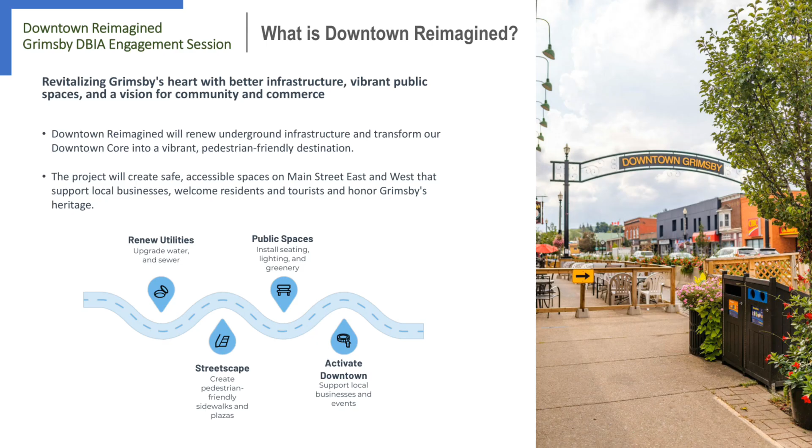The town has partnered with consultants who are industry experts to implement this project. We have been working in collaboration with the Downtown BIA, the Grimsby Chamber of Commerce, and the Niagara region. As the town prepares for construction beginning in 2026, this presentation is intended to update you on the progress of the detailed design and to showcase what we will be building.

The visioning phase culminated in the creation of a conceptual design, and we have built on what we heard from you to create the current design. The following slides will walk you through the updated proposed phasing and timing of the downtown project and explain how access to storefronts will be maintained throughout the work. There will be an emphasis on communication throughout the remaining design and construction phases, and we will outline how and when information will be shared as details are finalized. We want to hear considerations from businesses so the town can address what matters most as construction planning moves into its final stages.

During the visioning phase, we heard some really great feedback from businesses and the public. There was a lot of positive input with respect to improvements which should be considered. We also heard some concerns about things like availability of parking and traffic congestion. Some of the overarching themes we heard include the importance of improving the overall pedestrian experience. We heard strong support for a mid-block pedestrian crossing between Ontario and Mountain Street, ways we could enhance the streetscaping that would be complementary to the historic character of our downtown. The importance of these improvements in helping support the long-term health and prosperity of our downtown, and the need for the town to develop a strategy to help guide how we should be handling vehicle parking as the downtown continues to evolve. There were various outcomes from the visioning exercise.

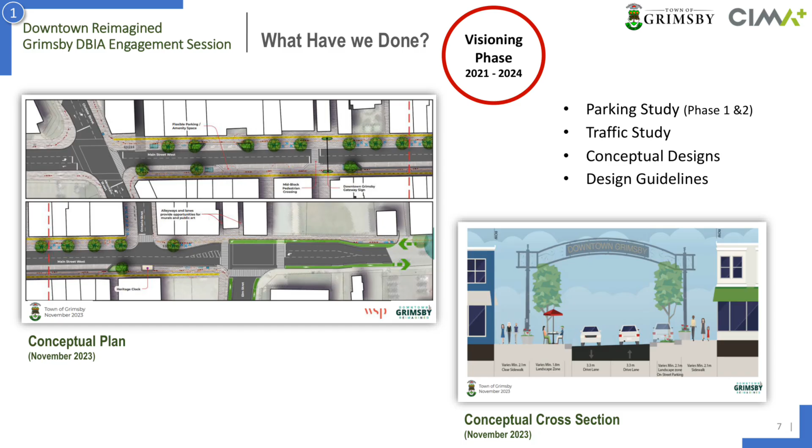As we moved into the design phase, we have had many opportunities to collaborate with our downtown business partners. If I could sum up the general sentiment, people are really excited to deliver the vision, but they are also concerned with the impact construction will have on their businesses. We have heard a lot of feedback with respect to the scheduling of the construction. Earlier this year, the consensus seemed to be to do the work during the summer, and that it was important for us to stay away from the Christmas season. However, more recently we have heard that the summer would be challenging and that we should avoid summer construction altogether.

Some of the themes we have heard include we should consider extended project hours, including around-the-clock or nighttime work, concerns about how we will be managing traffic, parking, and pedestrians, and questions about how businesses will be kept accessible, how their patrons will access their businesses, how deliveries will be received, and so on.

Building off your feedback, we wanted to update you on our progress and show you how that feedback has been incorporated into our work. The town has hired a professional design consultant to lead this project, who have experience in managing projects of this scope. With their support, we have now reached the 60% milestone in the overall design and are on target to put the project out for pricing early in the new year.

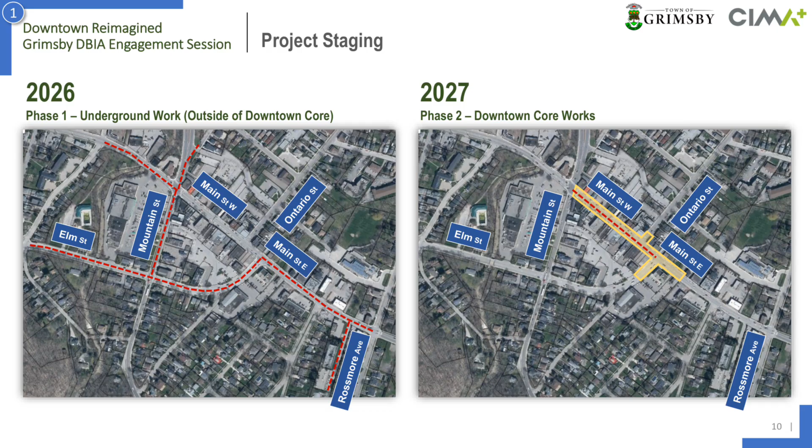There are several key risks we have and will be managing as we move through the project. In terms of scheduling, utilizing a 2-phase approach will allow us to minimize these risks by isolating disruptions to smaller zones and shorter timeframes. The way we are staging the work will allow us to maintain dedicated customer routes to ensure access is maintained to the storefronts.

The staging approach also allows us to keep the work zones smaller, refined to specific areas, which gives us greater ability to keep the traffic flowing to the parking lots. We have done a lot of pre-investigative work to locate underground infrastructure ahead of time, which will help limit finding unknowns when we start digging up the road.

Phasing the work gives the town more time to refine the road design, helping limit scope changes during construction, which can cause delays and become more costly. Breaking the work out into 2 smaller phases means the scope of each phase will be more manageable for the successful contractor. It also allows the town to have closer oversight on the contractor's progress so we can make adjustments as needed throughout the project.

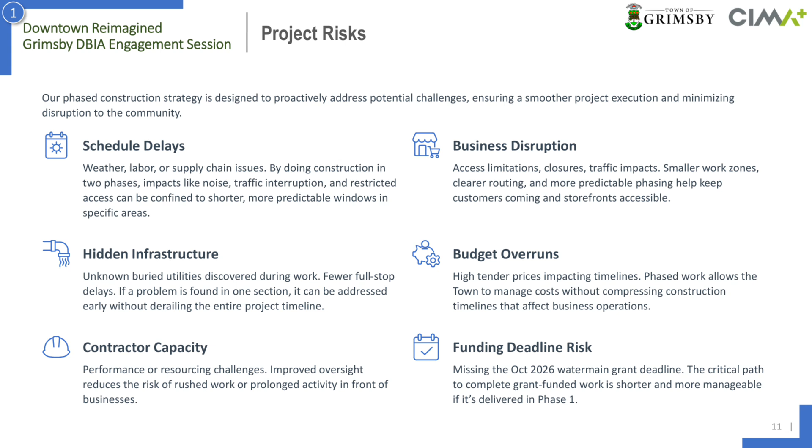The grant deadline requires us to complete the water main work by October 2026. Phasing the work allows us to specifically focus on the grant-funded component in 2026 to ensure we meet the target deadlines.

Now, we would like to walk you through some of the key design features associated with the road construction. This work will be taking place within the core area of downtown on Main Street between Christie Street and just east of Elm Street. Our focus today will be on the landscaping and streetscaping features in this area. As this is a regional roadway, the design will continue to be refined in consultation with the Niagara region.

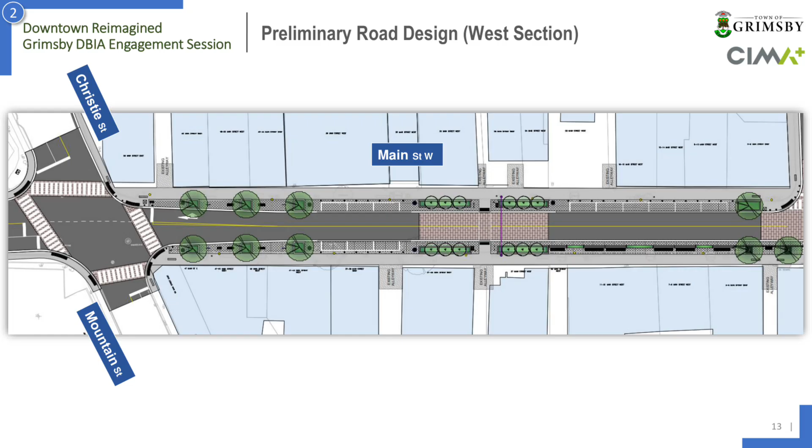This first slide shows the area of Main Street between Christie Street on the left and Ontario Street on the right. We have carried forward a similar road cross-section as was shown in the conceptual plan. We have taken the existing roadway that could accommodate 2 parking lanes and 2 travel lanes and converted it to a 2-lane roadway and moved some of the parking onto the boulevards. Narrowing the cross-section like this allows us to create additional pedestrian space within the boulevards and will also help to calm traffic moving through the downtown.

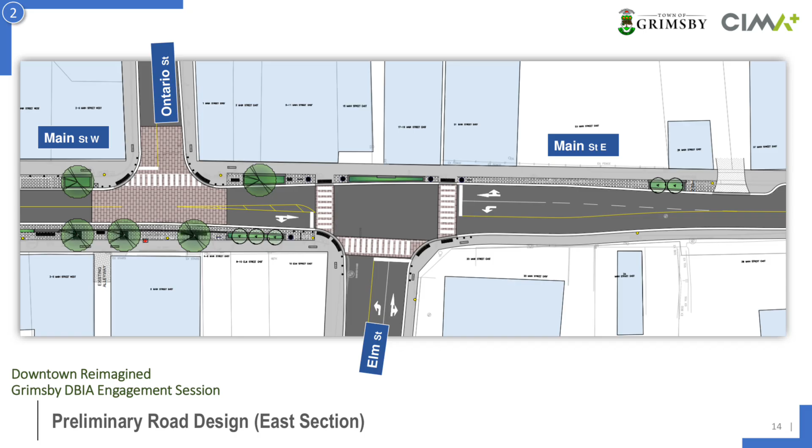While the town will continue to explore how best to accommodate bike facilities on Elm Street, the section of Main Street is currently too narrow to provide either bike lanes or a pathway without acquiring additional lands. Therefore, we decided to exclude bike facilities on Main Street in the current design and look to add cycling facilities as a future improvement. This slide shows the new road cross-section we will be building.

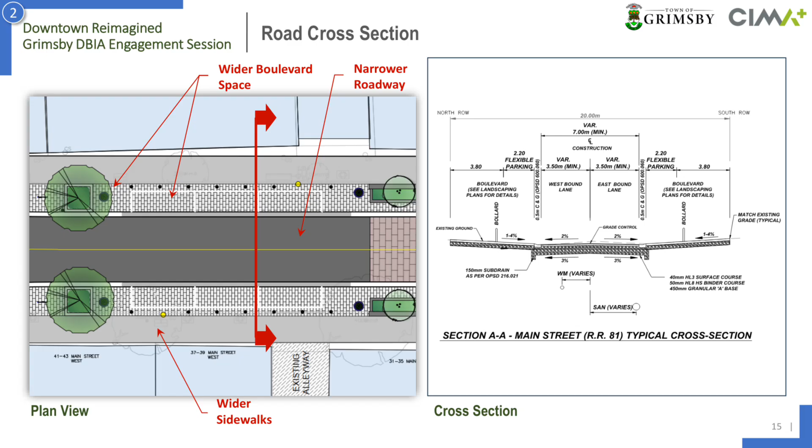This particular area shows where the flexible parking is being provided. We are using a minimum lane width of 3.5 meters for a total road width of 7.0 meters, which is a bit narrower than the town's standard road width of 8.5 meters. The flexible space design will allow the boulevards to be converted from parking space to pedestrian amenity space for things like patios, based on need.

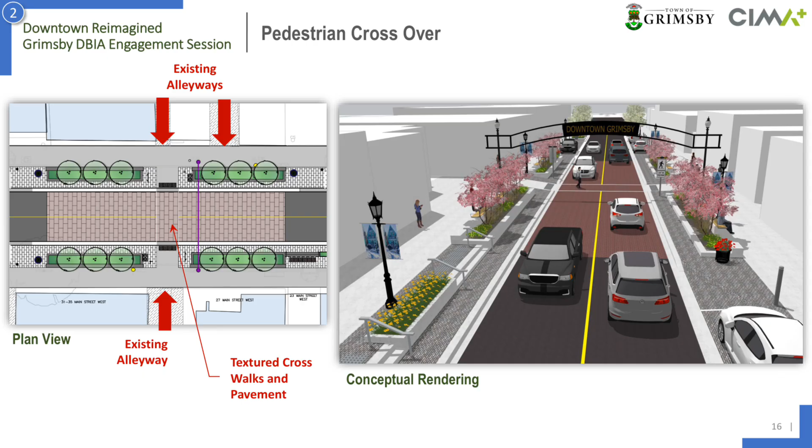As you can see from the images, the location selected is in close proximity to the existing overhead downtown archway. This location was selected as it is centrally located between Christie and Ontario, and it aligns with two existing alleyways on the north and south sides of the road. We are hoping this location will help improve pedestrian accessibility from the rear parking lots to the businesses located on either side of Main Street.

One of the key goals in our design is to improve pedestrian accessibility, comfort, and safety. With these goals in mind, we are proposing changes which would make significant improvements to the pedestrian space around the intersections. We have been able to pull the curbs in tighter to provide wider space for pedestrians, and we are also proposing traffic bollards around the intersection corners to help protect pedestrians from turning vehicles.

At the Ontario Street intersection, we have been able to pull the stop bars and pedestrian crossing further away from the building fronts, allowing stopped vehicles to see approaching pedestrians. This is an issue with the existing intersection that we are trying to improve upon.

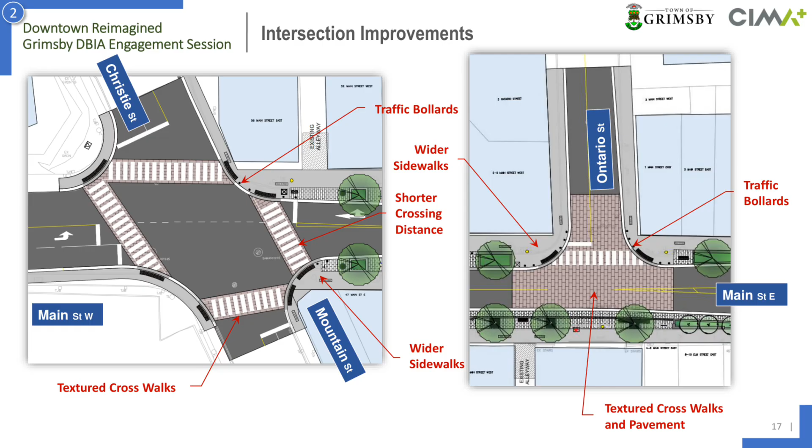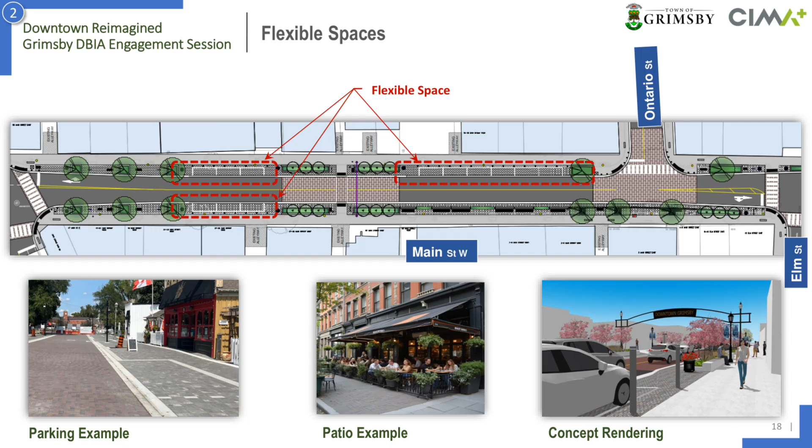Turning our focus to the flexible spaces, by moving parked vehicles onto the boulevard, we will now have the ability to turn this space back over to the pedestrian realm at different times. We can see it being used in warmer weather to support patios and turned back over for parking uses in the colder months, but ultimately this could evolve over time. The pictures here show how this space would function in different scenarios, and we have also provided a rendering that shows what this might look like in Grimsby.

Another focus for our team was considering how we could use different materials and colors on some of the ground surfaces to help animate the space. The town and the region are currently exploring the potential for using stamped asphalt materials as part of the road surface.

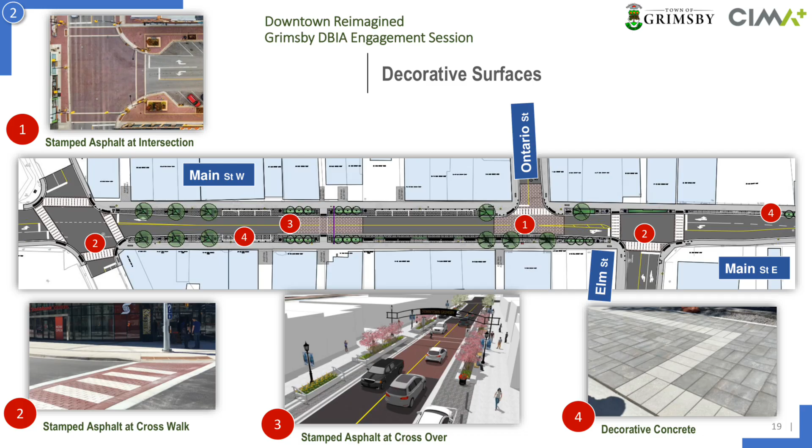Landscaping and greenery are other key features that we are trying to incorporate into our design to help enhance the character of the area. Raised planting beds will help provide safe and sustainable space for vegetation to grow. Similarly, we will be planting new trees with decorative tree grates and tree guards and cages to help support their growth without damage. We are specifically looking to plant native species which are known to be resilient in an urban setting, to help foster the growth of these trees to their maturity.

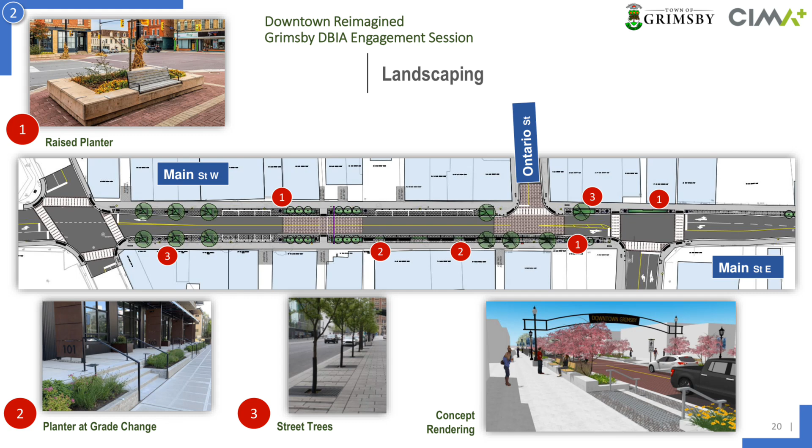One of the other new features we are looking to add to the area is wayfinding signage. We are still in the early phases of determining what that signage could look like, but we have provided a few images to show some initial ideas. We are considering some form of business directory sign and possibly a community message board placed at a couple of key locations. These will also be supported by trailblazing signage, which will help point people in the direction of some key landmarks in the area.

We are also looking at using some form of ground plaques with imprinted street names. This will support the overall wayfinding strategy, but also serves as a bit of a unique design feature within our downtown. Another cool feature we are looking to incorporate is the idea of providing standardized building address and business signage. As these features will be affixed to the actual buildings, we would need the building owner's support to implement this idea, and we look forward to exploring this opportunity further as we move through the design.

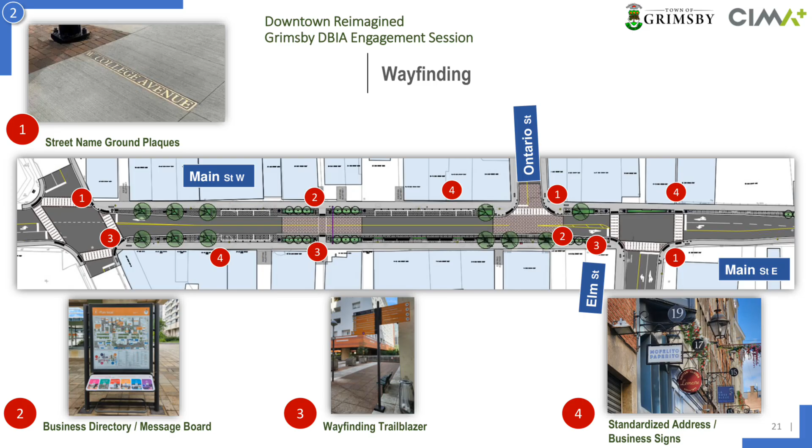Some of the other features we are looking to incorporate into the design include replacing our existing streetlights with brand new decorative lighting. The new light poles will include the ability to add decorative banners, hanging planters, as well as seasonal lighting. We will also be looking at traffic bollards with built-in lighting. This will help activate the space in the evening while at the same time providing additional safety for pedestrians.

We are also looking at the possibility of including public Wi-Fi on the street, and possibly a sound system which will allow us to provide ambient music in the area.

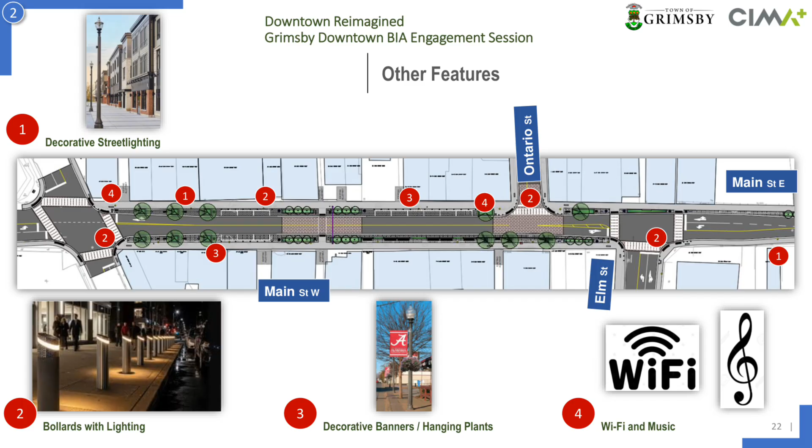We have reached the 60% milestone of the engineering design package, which consists of approximately 40 detailed design drawings, including all of the underground water main and sewage works, both storm and sanitary, and the above-ground streetscaping features within the core area that we just went over.

We are planning to complete the Phase 1 design package within the next couple of months, at which point we will tender the project, sending it out for competitive contractor bids. Tendering the contract early in 2026 will allow us to secure better pricing for the upcoming construction season.

Phase 1 will consist of the water main sewer work outside the core downtown area. The next few slides will show you how we see the work being staged.

We will begin with Phase 1 works in 2026, located outside of the core downtown area. Please keep in mind the successful contractor is ultimately responsible for scheduling how this work happens, and will likely be able to stage the work more efficiently than we are showing. With that said, we wanted to show you how we think the work will occur, to help inform businesses ahead of time and obtain your feedback.

During this phase of the project, we anticipate a minimum of 2 construction crews being needed. The contractor will need to complete 2 water main crossings under 40 Mile Creek. As these crossings require a different construction method, called horizontal directional drilling, it will require a specialized construction crew to be on site. This method will require the contractor to occupy a set area over an extended period of time in order to drill, assemble, and lay the new water main pipe.

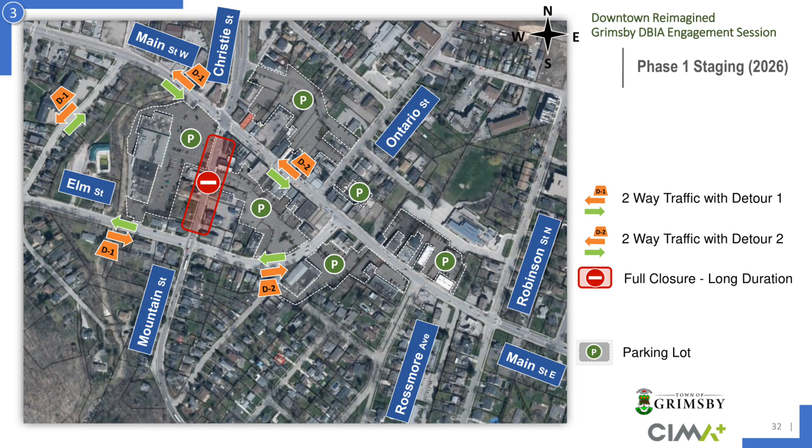During the closure, we will need to incorporate localized detours, but we are also considering establishing a separate detour route for truck traffic, which will help avoid large trucks trying to navigate through the downtown. The contractor will need to maintain pedestrian access to each of the businesses on Mountain Street, and we will be working closely with the businesses on this section of road to make sure we are able to support them through this phase of the work.

We see the intersection of Main, Mountain, and Christie requiring another nighttime closure due to multiple water main connections. Again, this would be carried out over a few nights while reopening the road to normal traffic during the daytime.

The last section of water main in Phase 1 is located on Christie Street north of Main Street. The width of the road here should allow the work to be completed while 2 lanes of traffic are maintained.

We anticipate that we will need to close the southbound left turn lane from Christie onto Main Street during this stage. This will likely require us to restrict left turn movements onto Main Street in order for us to keep the traffic flowing. We would therefore need to consider implementing a local detour in order to bring those left turn movements down to the Elm Street intersection instead.

Now we will be switching to the Phase 2 works, which will be occurring in 2027. We are recommending that work be completed in 2 stages. Given the scope of work here, we believe the best approach for these stages is to close the roadway to through traffic completely. The approach we will be walking you through is very similar to what was employed for roadworks on Ferry Street in Niagara Falls, as well as in Paris, Ontario, for their downtown work.

The second stage of the 2027 construction work will be at the intersection of Main and Elm. Again, the road would be closed to traffic here, and detour routes would help direct vehicles to the businesses on either side of the closure.

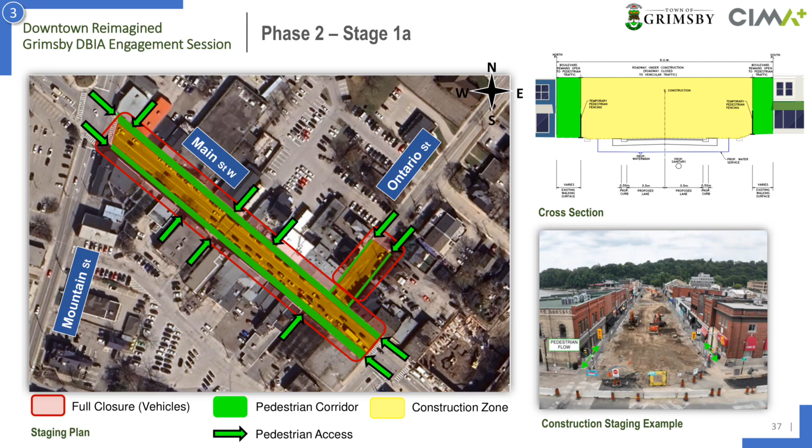Stage 1B will shift the contractor's work area to the north side of the roadway. Pedestrian traffic will be handled in the area where the new road surface has been placed, along with the southern boulevard. Pedestrian accesses for businesses on the north side of the road will be provided via temporary access ramps. Essentially, there will be fully accessible bridges through the construction site to allow pedestrian flow, while separating them from the construction equipment using fencing.

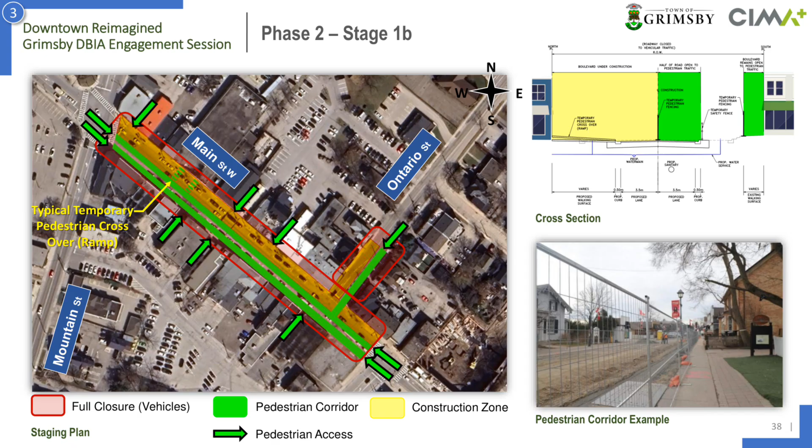In Stage 1C, we will be flipping the construction work to the south side of the road.

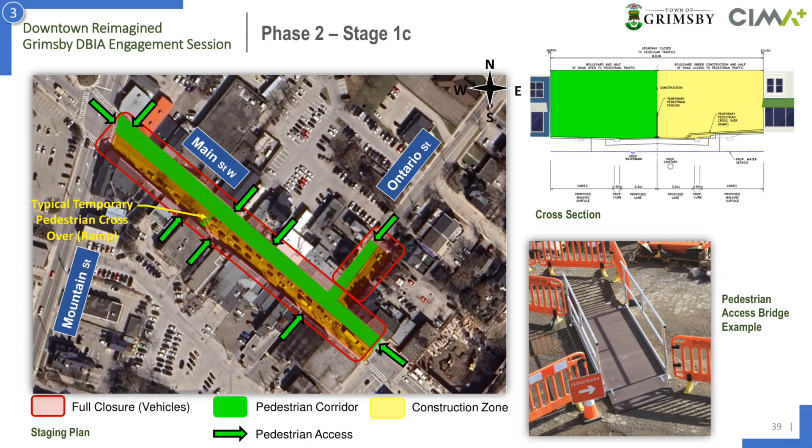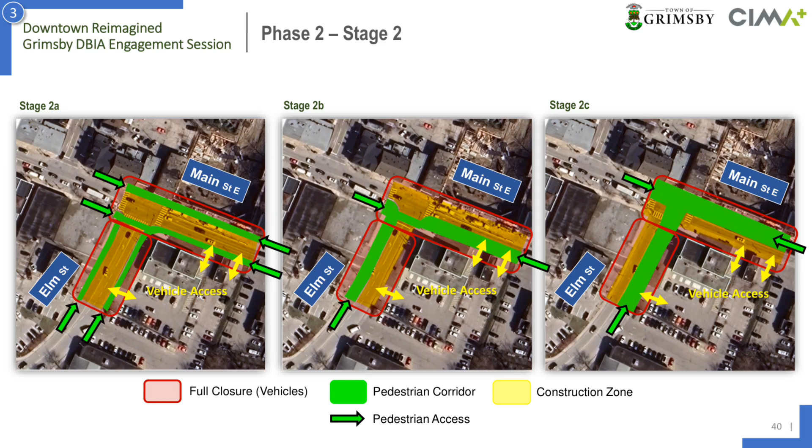Once the bulk of the work is complete in Stage 1, the road will then be reopened to traffic. The contractor will then turn their focus to Stage 2 at the Elm Street intersection. Similar to Stage 1, this work would be broken into 3 substages. Work will begin in the center of the road with pedestrian accesses maintained on the outside of the roadway. They will then move to one side of the roadway, followed by the other side, using the same staging techniques as during Stage 1.

The project team will be working collectively to develop and implement a detailed communication and marketing strategy throughout the construction. Some of the items we will be focusing on include construction signage. We will work to make sure signage is clear, visible, and strategically placed to guide pedestrians and drivers to open businesses. Mailouts will be used periodically to reach every household and business.

We will also be developing a targeted community outreach program to promote Downtown is Open messaging across our public spaces. We will also be coordinating with GPS platform providers like Google Maps and Waze to ensure real-time updates keep people moving and avoid confusion. Local and regional newspaper ads will be used to run consistent ads and updates in order to reach wider audiences and reinforce that Grimsby businesses are open. We also expect the BIA to organize various events to continue to draw people downtown, even during construction.

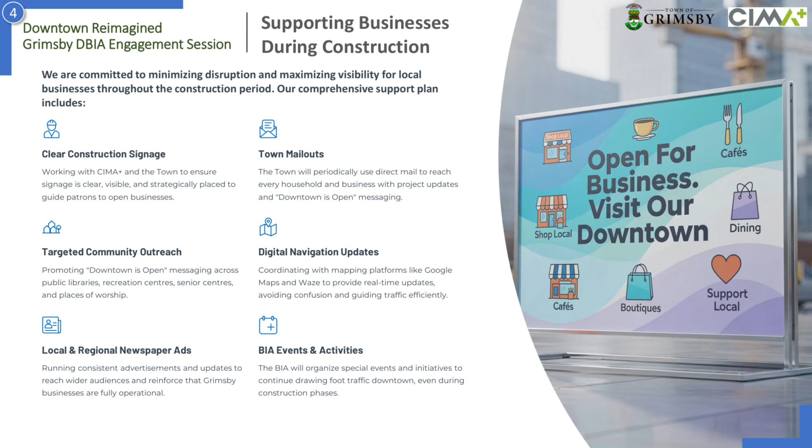The project team is using the town's Let's Talk Grimsby webpage as a central hub for project information. Everything from design documents to updated timelines will be posted on a regular basis. This is intended to be an interactive space where people can provide feedback, answer surveys, and be part of shaping the overall experience. We see a monthly email newsletter being used to update on progress and project milestones, telling people what's coming up next, and providing quick links to resources.

Council meetings will be used to provide more formal updates to the community, publicly helping ensure accountability. Social media will be used actively while ensuring messaging from the town, the BIA, and our partners are aligned, keeping the information flowing fast and wide.

The next section of the presentation is dedicated to hearing your feedback. To help guide the discussion, we have categorized things into a series of themes. The first theme is around staging, phasing, and sequencing of the work. We would like to know if the approach we presented makes sense from the perspective of a business operator. Is there any part of the timing that you would like further clarity about? Is there anything we can do to help you better visualize how the work will progress?

Construction impacts and business operations. Are there any operational considerations we need to be mindful of during construction? Are there any site-specific issues near your property that we should be aware of? When thinking about access, parking, and customer flow, what matters most to you for your day-to-day operations?